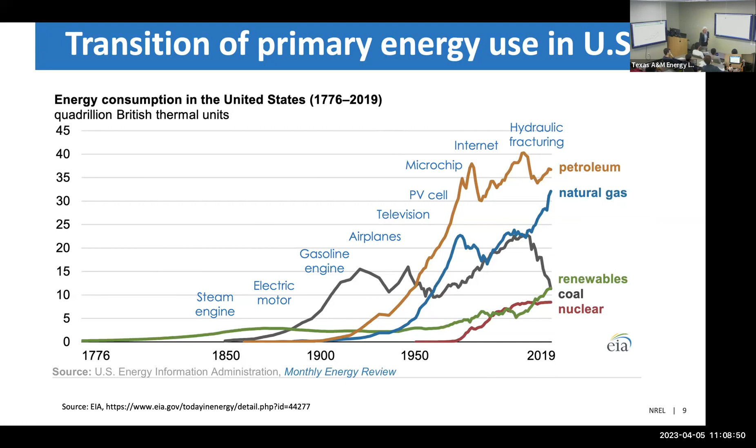And just to give some examples of those, if you look at lighting, lighting was wood and candles, and then it got replaced with lamp oil, which was an amazing innovation at the time. And in fact, some of that came from whale oil. That whale oil burned very clean and gave a good quality of light. And while it's technically renewable, it is not renewable on the scale that it was being used. So we ended up having town gas and then kerosene that replaced those oil lamps.

And we actually hit peak whale oil in 1846. So you hear about peak oil now; this was peak whale oil. So I like to say that the oil and gas industry saved the whales, because it ended up replacing where we got our lighting from. And then, of course, we had the conversion to electricity, where incandescent lamps replaced the gas lamp.

But it's an example of a demonstration project, how you show the public what a new technology is like and how that's important. And then, of course, now we're at the end stages of replacing our incandescent lights with LED lights, which are much more efficient, produce a lot less heat, and give us a lot of benefits as well.

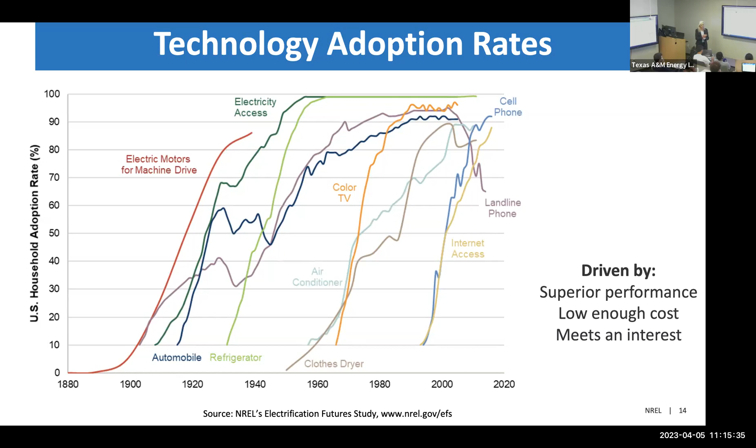So really, people adopt technologies because they have superior performance. It's a low enough cost, so people will pay more for new technologies if it's a low enough cost. So people didn't need a color television, but when it got to a low enough cost, people then wanted it. So it also meets an interest. It doesn't have to be a required technology, but it has to meet enough interest, be a low enough cost, or have a superior performance that it replaces an existing technology. So when we think about energy technologies, these are sort of the general things we want.

And then this is just an example of our energy transition in electricity in the US. Most of you probably know we've been seeing a significant decline in coal. And this is generation, not capacity. Renewables have now surpassed coal. There was a bit of back and forth, and they surpassed nuclear at this point in terms of the amount of generation. But really, it's natural gas driven by hydraulic fracturing, and then renewables driven by these cost declines. And you can see wind and solar being the key.

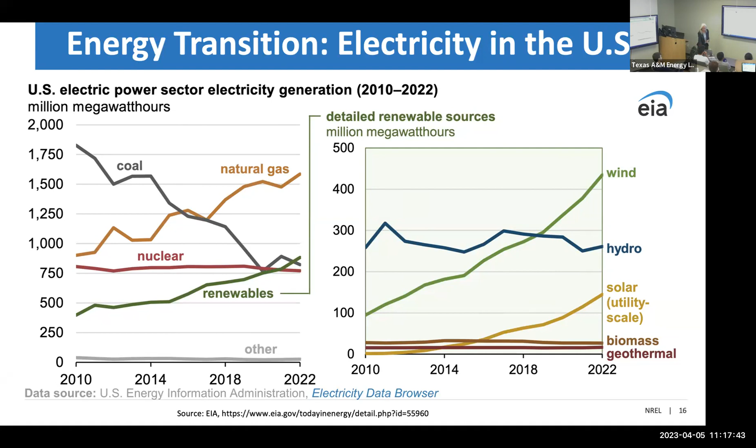And then you think about how this transition looks. This is starting from 1985, and you're seeing this wedge here of renewables that's growing pretty significantly. Hydropower, of course, has been staying pretty much the same. And then nuclear power has also been pretty consistent over this time frame. And then you see the increase in gas and the decline in coal.

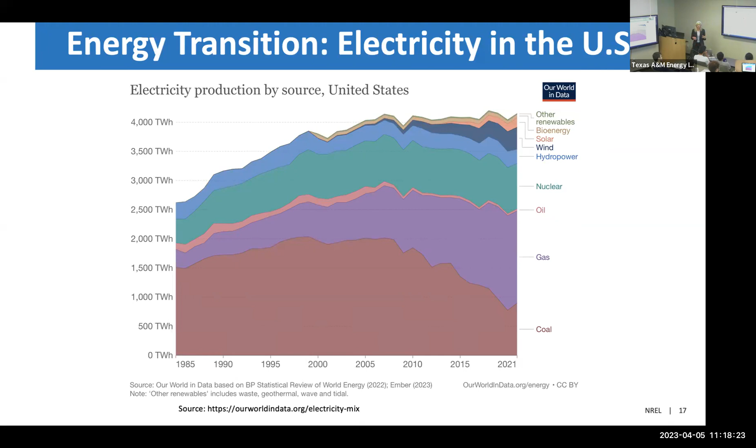Another thing to note about this chart is that it's flat at the top. So we had a growth in electricity up till about 2005, somewhere in there, 2008, and then it really hasn't increased since then. However, we might see an increase if we start electrifying vehicles, buildings, heating, industry. So something to think about.

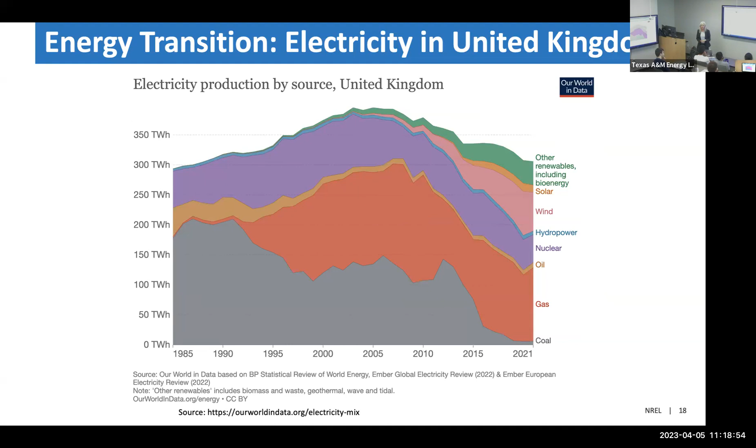Other transitions in other countries have gone differently, though, or dramatically. So if you look at the United Kingdom, for one thing, note they're down to the same amount of electricity they used about 1990 or the late 80s. So they've actually declined in their amount of electricity. And they are getting similar to the US, about 40% renewables, but they've pretty much taken their coal power down to zero as they produce gas and renewables.

And then I just spent 10 weeks in Japan, so I have to put one up here for Japan to show that they have flat to declining energy use, but they had a rather dramatic incident. So of course, after the Fukushima nuclear accident, they shut down all the nuclear power plants. They are reopening. But that resulted in a significant increase in gas, a little bit of increase in coal, and then a very big growing solar.

They are now third in total solar: China, US, Japan. So sometimes the transition is due to policy, sometimes it's due to economics, sometimes it's due to a specific incident. They are reopening their nuclear power plants, and you can see that.

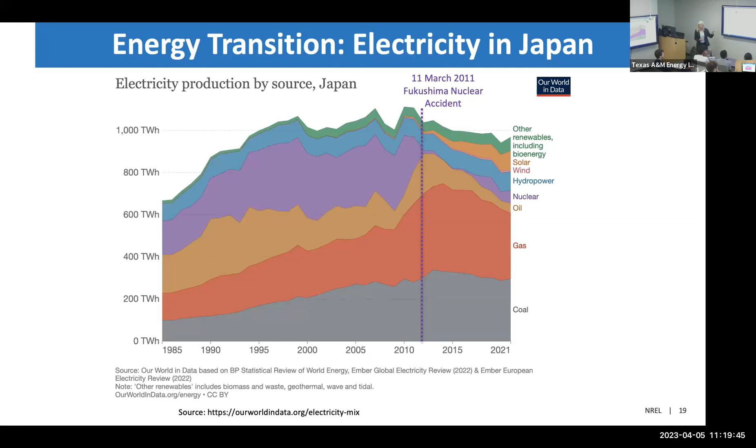All right, so that's kind of thinking about the past. The key points being that transitions happen, it's perfectly normal, and you have different types of technologies coming and going, and there's different reasons why they grow and change. So thinking about some future scenarios, where are we going in the future?

Well, the first thing I want to point out is you want to be careful on the definitions, because people are very loose in these definitions, and people say renewable energy, clean energy. So I wanted to make sure we're all on the same page when we say these different terminologies. So renewable energy being energy sources that do not deplete within a human civilization lifespan. And this is usually solar, wind, geothermal, usually biomass, but not always. Usually hydropower, but not always.

Hydropower is renewable in the sense that the water is going to keep flowing, but some policies and organizations do not include large hydro because it does have significant environmental and land use impacts. All of these technologies have environmental and land use impacts, but sometimes hydropower is included. Interestingly, California doesn't include it in the first part of their policy for 2030, but they do include it for their 2050 goals. So sometimes it's included and not within the same policy. But those goals are defined by production levels. Megawatt hours have nothing to do with greenhouse gas emissions directly.

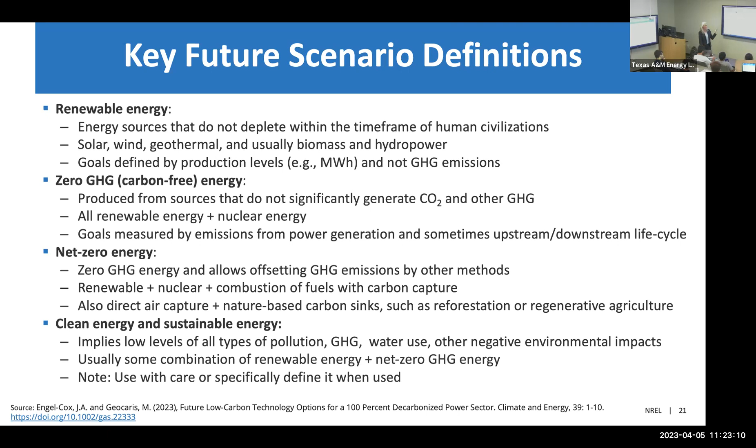So I know you probably know a lot of this, but I think it's really important for us to be thinking about these terms that we use. And you can see from a policy perspective why it's important, because every state's got a different goal, different year, and it's all based on different definitions. Sometimes it's renewable energy goals, sometimes it's clean energy goals. Different states include different technologies. Sometimes they include hydro, sometimes they include different things. Sometimes they give extra credit.

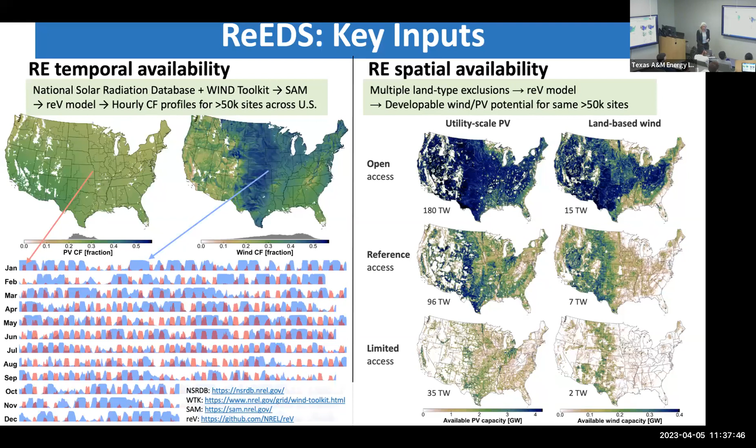The middle one is kind of probably what's going to happen, a reference case, which means land that's really high, mountain peaks, maybe federal national parks, things that you can't access, are taken out, or urban areas. And then limited access would be if you really limited the places where people did not want transmission or new build capacity. So this is kind of showing you the different spatial data that went into the model.

So I'm going to go through a number of the different findings from this. Finding one is that it will be really challenging to fully decarbonize the US electricity system while meeting potential increased demand. If we go from the EIA Annual Energy Outlook, it shows a little under 1% growth in electricity demand. But if you do an accelerated electrification, if you get a bunch of electric vehicles, everyone converts to heat pumps, all these things that reduce our fuel usage and increase our electricity, we could have 3.5% annual growth of electricity, which we haven't seen since the 1950s, 60s, 70s in the US. It's not exceptionally high compared to the past, but it's high compared to the last 15 to 20 years.

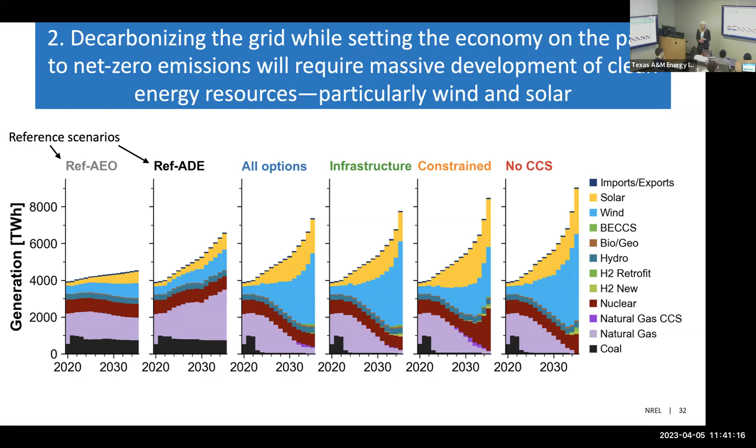And then what's interesting, the nuclear here is in red because this model looks at economics, and it's going to be really challenging for it to compete economically until you start constraining transmission and constraining land use for renewables. At that point, the model says maybe you're going to have a new build of nuclear power, because then it'll be able to compete cost effectively.

Watching the time, already over time.

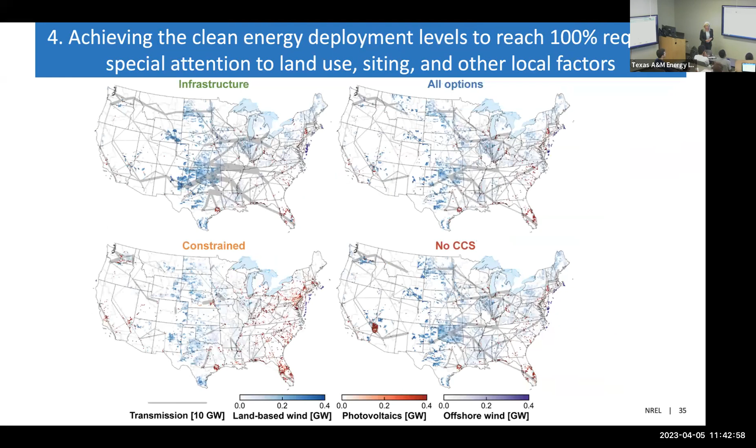The big challenge, finding 5 of this study, is that getting to 100% means overcoming seasonal imbalance. The daily is manageable, but there will be days when you are going to have combustion-based generation, particularly in the winter when you have a heating load, in the summer when you have a cooling load, and then in the spring and sometimes in the fall, you're going to have so many renewables that you're going to have to curtail. You're going to have to overbuild the renewables to try to match this, and then you're going to have too much of them in the spring.

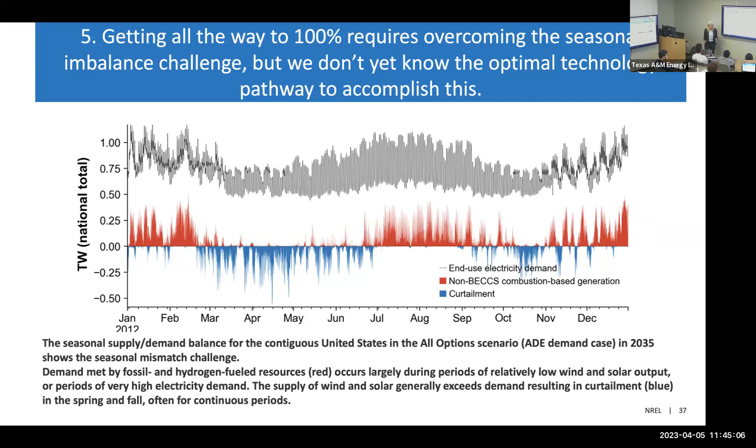So this is where you're going to need some sort of seasonal storage. You don't want to just throw this electricity away, or you don't want to have to overbuild so much. So this is modeling what that would look like. Transmission will help with this as well.

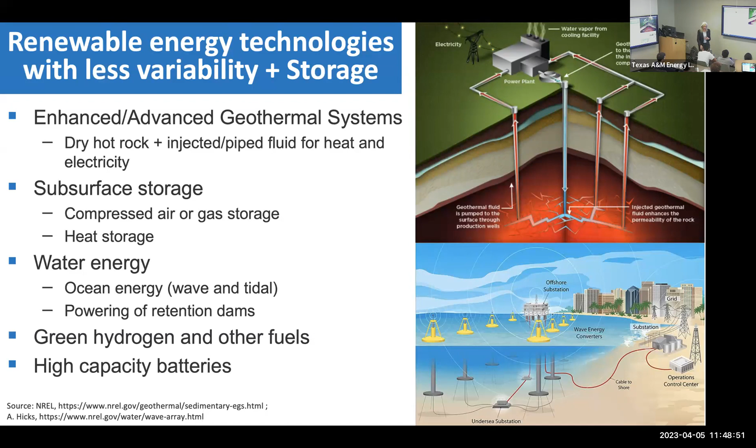And what I find very interesting is, something like 80 to 90% of the dams in the United States are not powered. They're just for flood prevention or water retention for agriculture. We could power some of those, even if they didn't run all year round. That would give us a giant water battery, and pumped hydro is another good seasonal storage. And then, of course, a lot of people are working on green hydrogen and high capacity batteries with different battery configurations that would be able to store energy for longer times.

Also, people are looking at virtual power plants. You're basically bundling and coordinating the operation of a lot of small private generation and storage, operated in a way that interfaces in a coordinated way with the grid. A number of companies are starting to look at these virtual power plants that actually end up doing payments to the consumer. You've got solar panels on your roof and a battery system, and you'll get a note that says, hey, we need some of your electricity from your battery, we'll pay you $50 for it. You're like, yep. And then that goes into the grid, and you just recharge it with those solar panels later.

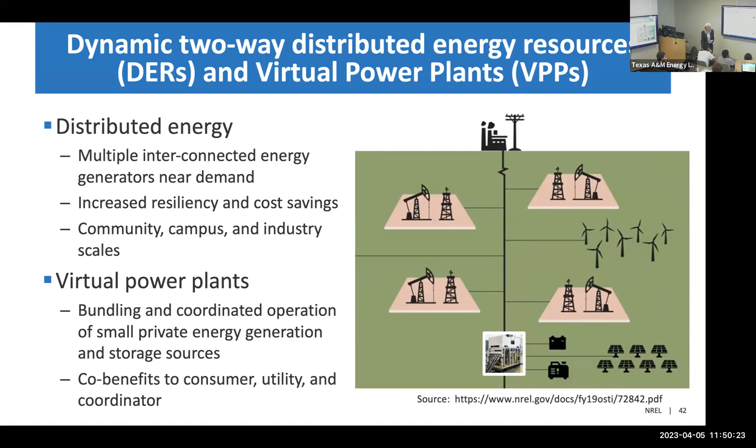So this is a direction where I think we tend to focus on the large grid because the US has a large grid, but for other countries, this may be the way we want to go, thinking about building out the electricity system in this more dynamic distributed way.

And then I also want to mention land use, because I talked about the constrained scenario. Land use is going to become an increasing issue with renewables, and we're already seeing it. We don't want to take good farmland for renewables. So how do we do that better? Well, with wind turbines, farmers can already grow crops around them. They take a relatively small amount of space. They actually pay the landowners thousands of dollars every year per turbine. And farmers have said that it provides a lot of stable income to them. It's not income that's based on the weather or on variability in their crop growing.

And what's interesting is, by providing partial shade, you end up getting more plants growing, you get more vegetables, especially in hot desert climates. It increases the soil moisture retention, so the soil keeps its moisture. And it actually improves the operation of the PV panels because, rather than having a hot surface underneath, it's cooling underneath the PV panels and they operate at several percent higher efficiency.

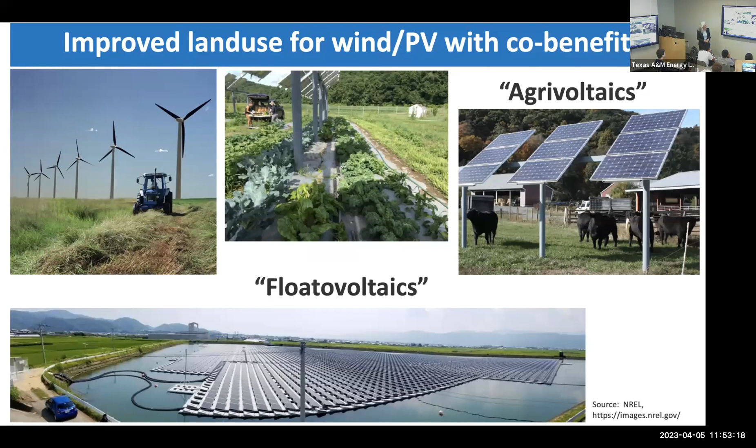And then this is something that people jokingly call floatovoltaics. It's floating solar. You would not do this on a natural lake because you don't want to damage the lake, but water retention ponds, cooling ponds, irrigation canals. I think California's looking at putting these all along irrigation canals. It reduces evaporation, so it actually saves water, and also keeps the panels cooler for operation. This is a picture from Japan of a floatovoltaic installation. So we're seeing a lot of interesting ways that you do land use for benefits.

We need to be very careful thinking about social and land use constraints, technology acceptance, and transmission; those can't be ignored. We can develop the greatest thing ever, but if no one wants it next to their house, it's never going to be built. And then think about the definitional issues. Is nuclear included? Is large hydropower included? Is carbon capture included? How are we going to work with the existing energy industries going forward? So we're going to need technology solutions, both existing and new ones, and we need to continue to fund research into new technologies.

And I think it's really important to recognize that all energy transitions have positives and negatives. Remember I showed the manure crisis and the air pollution? We already know that there are challenges with our new energy transition going forward. That's okay. The key is to recognize the challenges and then seek the solutions before they become big problems. So everyone got concerned that you can't recycle wind turbine blades. We're already developing new solutions to recycle them before we have millions and millions of them. So anticipate and mitigate the future problems.